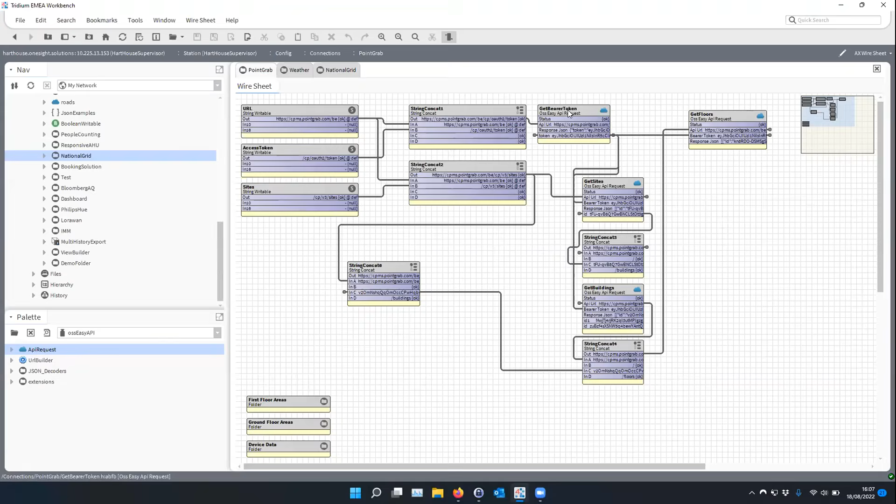Let's take a look at one. You see it allows you to build an HTTP command with a URL, parameters, header options, and you can bring back the response, which in this case is a token for authentication. Again, referring to get, post, put, and delete commands there - any credentials, supports all modern authentication mechanisms, bearer tokens, basic auth, OAuth, etc.

We also include some other tools in here to help you decode and handle JSON, build URLs, etc.

So getting to the point, what can you do with a tool like OSS Easy API? I suppose the answer is pretty much anything you want. Just looking over the front page of our website, we've got a few examples of things we've done in the past with it, and some examples of integrations our customers have made. Pulling in non-building specific information into Niagara is what we typically find the use case for a driver like this.

News and weather information, IoT sensor systems such as LoRaWAN, vendor cloud-based air quality monitoring systems such as Airthings, Kaiterra, etc. Car parking management, third-party room booking systems that feed into a vendor cloud, people counting, desk occupancy, CAFM facilities management systems, etc. CRM integration, Office 365, you name it. This is designed as a universal tool for you to integrate with systems that support an HTTP REST API.

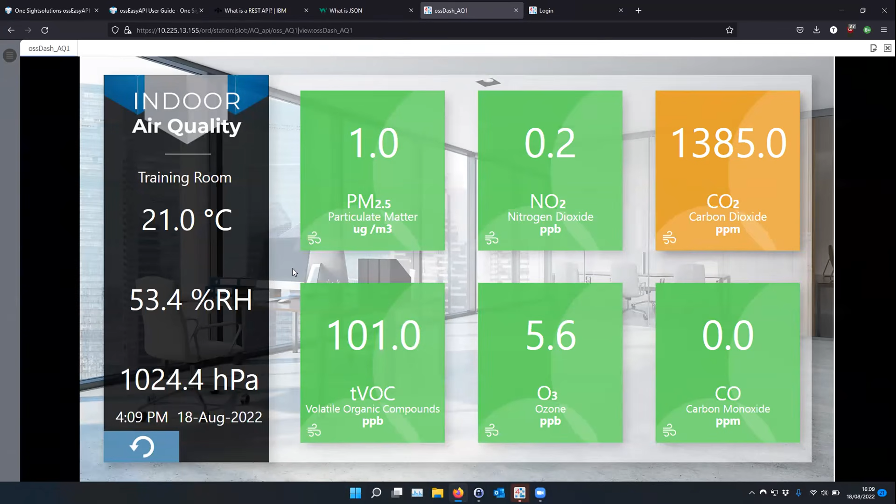You see here, for example, this is air quality information coming from an Airthings cloud-based air quality management solution. These sensors communicate via a hub up to the vendor's cloud, and the vendor publishes an API, which we have interfaced with using OSS Easy API, and expose the points from the sensors as standard Niagara points, which can be used just like you would any other point.

Some other examples - Transport for London. Maybe you want to enhance the occupant experience in your building, provide some traffic and travel information, London tube statuses. Car parking, for example - again, this is all coming into Niagara via a REST API from the Transport for London website.

Another example we can take a look at: we have a custom uplighting system in our offices here, WLED, if anyone's heard of it. You interface with that using an API, again documented. By interfacing with it using OSS Easy API, we can expose the various values and options as points in Niagara. Obviously, can provide some command and control functionality through a dashboard such as this.

Another cool thing we've done with it - we take some floor plans here, we've got some multi-sensors here. These happen to be LoRaWAN sensors, so they're feeding into a combination of the technology called ChirpStack or the Things Network. Both of those services have an API. In order to get that data back into Niagara, we've used OSS Easy API, interfaced with it, brought them back in, and exposed the values as Niagara points.

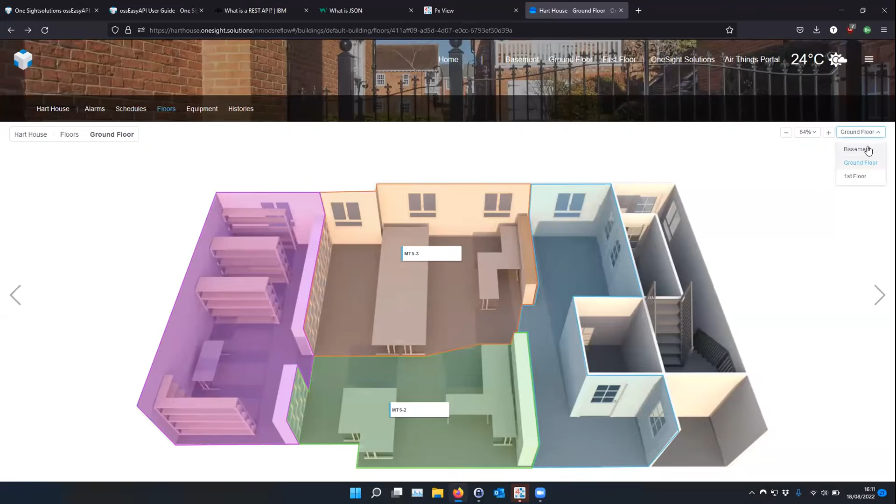Another typical use case we found with our customers - might be desk occupancy, so a third-party desk sensing solution reports its sensor data directly into the cloud. Integration option is a documented API again. Once again, utilizing Easy API with that single component, the API request component, we can construct our commands, authenticate against the API, bring back our list of desk sensors, and then break out the points.

It looks something along the lines of this. I'll just expand this out.

For example, you see our API call here that's bringing back our list of devices. Another pretty cool feature of Easy API is it does attempt to parse JSON responses for you - meaning it breaks out and gets at the data you're actually interested in rather than just giving you a big block of JSON data. So here we've broken out a list of devices automatically that exist on our Things account. You can see the different values associated with each sensor.

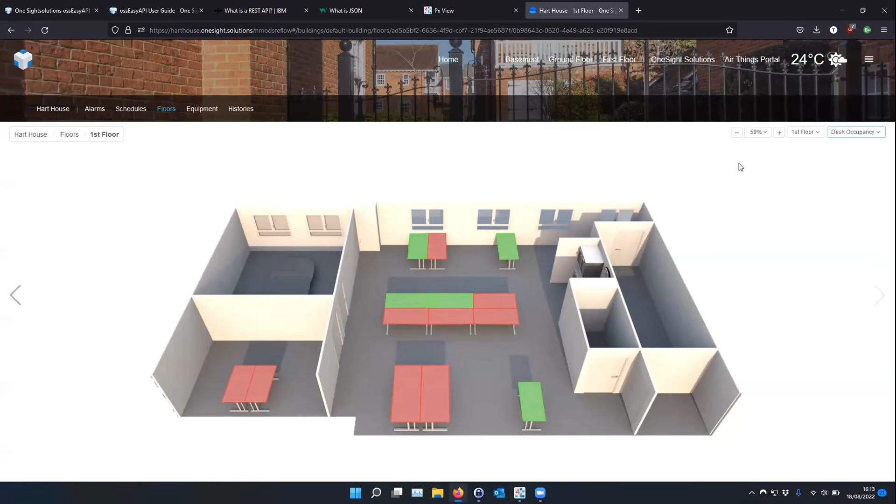So just before I close off, when we're dealing with APIs, this technology is not like BACnet or Modbus, where it's a very well-defined protocol. All BACnet is the same if it's true to the standard and the specification. APIs can be extremely varied.

So the key to it is documentation. Luckily, the documentation on how to use Easy API is all online, kept up to date for you, with plenty of examples. I'll shamelessly plug our YouTube channel as well - OneSight TV - where we publish videos on specific examples and take you through the steps. One on using OSS Easy API to generate alarms into Teams, for example, how to bring Airthings into it, bring in weather data using the Open Weather Service, etc. All documentation is available like that.

So long as a system you need to interface to supports an HTTP-based API, and the API is well documented, there's a fair chance you'll be able to use OSS Easy API to interface with it and extend your building system with non-building centric data or data from an IoT style system. And there you have it.

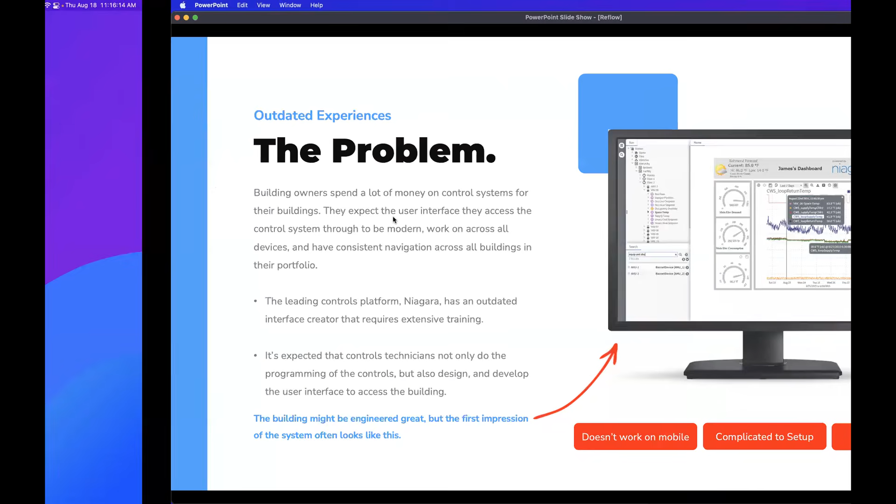So really excited to share Reflow with you today. I want to talk a little bit about the problem that Reflow tries to solve and some of the benefits you can expect when you pull Reflow in. We're in this changing and evolving landscape when it comes to user interfaces and customers and their expectations around those user interfaces. We've got building owners and operators who are used to a certain level of sophistication, and that expectation is growing more and more as time passes on.

We've got people using mobile apps like Instagram, Facebook, online banking, stock trading applications that have a really slick UI that works on their phone, developed by large not only development teams, but also designers and user experience focused individuals. And then they come to their building automation system, which could be quite expensive, and they're often confronted with a user experience that just doesn't quite measure up to their expectations.

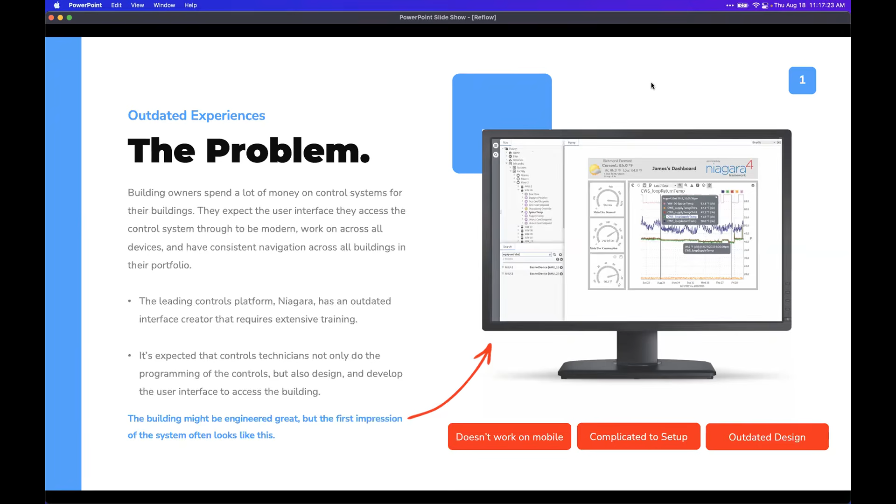Part of that problem is because our industry has put a lot on the shoulders of system integrators. We know that they're amazing engineers, and Niagara is the best engineering tool out there. However, when it comes to user interface and all of the things, including APIs that Tom walked through, we're now expecting a system integrator to not only wear their integrator hat and their customer service hat, but now they need to wear their IT hat, their web developer hat, their graphic designer hat, and user experience architect hat. It's too many hats to wear.

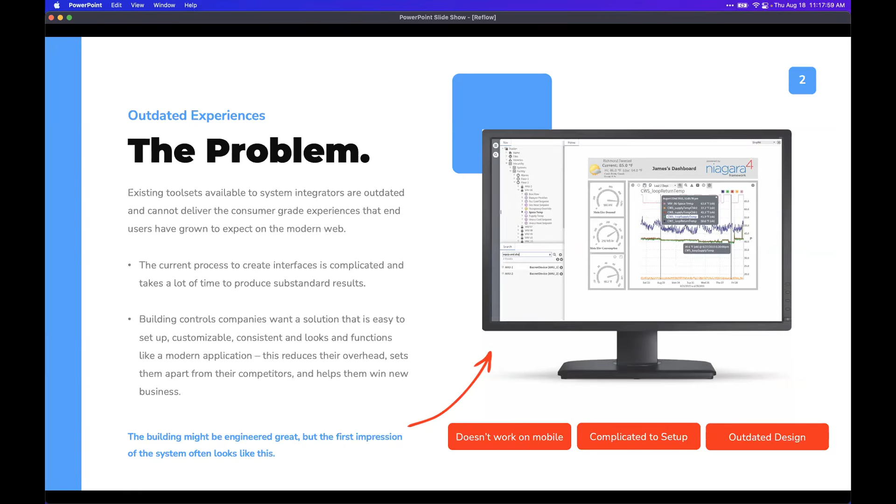So what we've tried to do with Reflow is provide a very simple solution to get modern graphics to end users. And instead of this process taking longer and adding labor to jobs, what we want to do is make it shorter and faster and easier than using Niagara out of the box.

We always say we're sort of like the Squarespace or the Wix for building automation. The idea would be you don't have to know what HTML even means to jump in and start creating content in Reflow. So I'm going to jump over to our website here.

I've got a few live demos available, and these are accessible publicly if you want to go in and play around with them after the webinar today.

When you click on them, you'll be brought to a web supervisor that we have in the cloud. Your login information will be filled in for you. Just hit login, and we're going to go through some of the end user features of Reflow here.

We've got 3 examples. When we say end users, typically we're referring to building owners, facility managers, building operators, maintenance staff, so on - the people that are consuming the building automation system. So we'll start here. This is a quick example of a building website that spans across a campus.

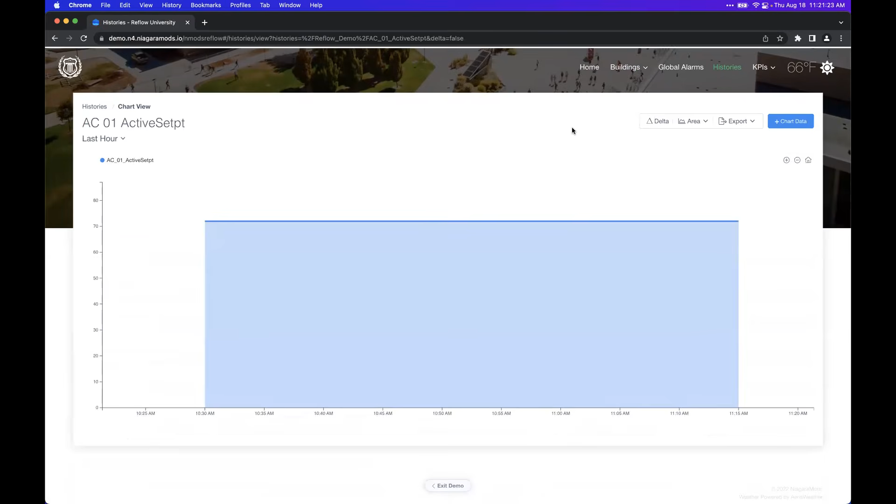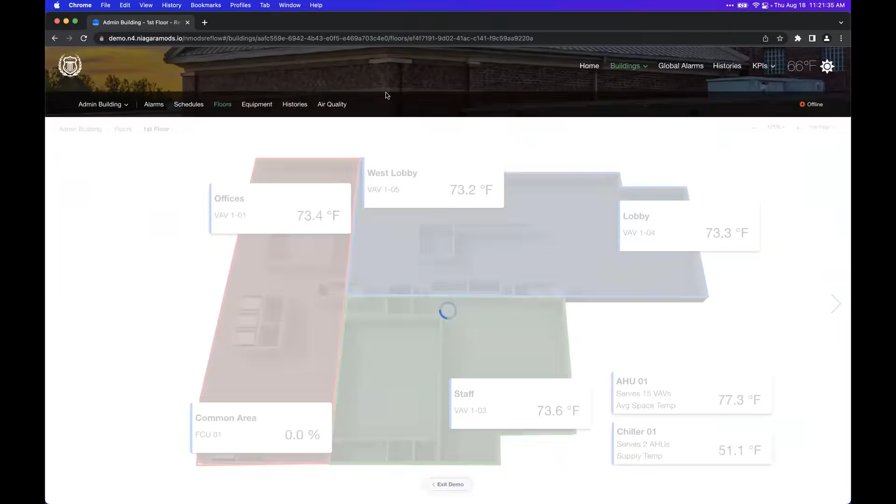Reflow also has a floor plan builder, so I can go into floors here. And you can see that we've got some labels and some zones. Floors are interactive, you can zoom.

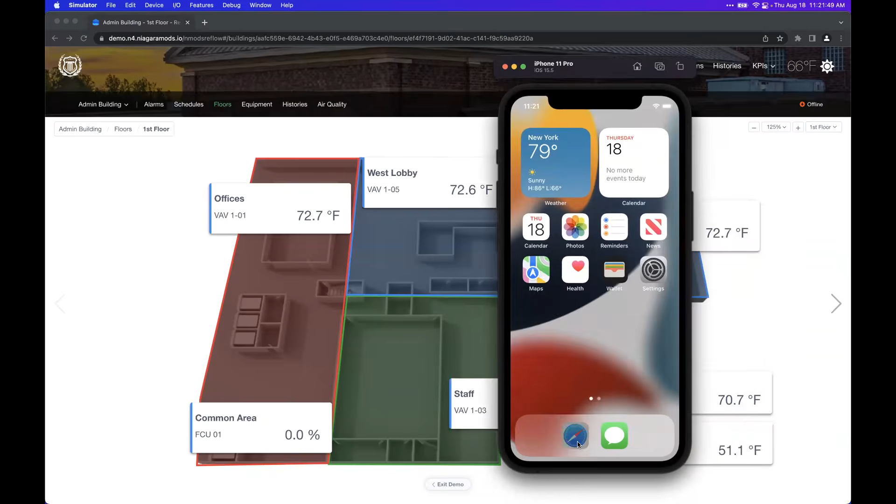And then the other thing, we mentioned multiple screens. So I want to bring over an iPhone simulator here and pull up the same demo and just show you what the mobile experience is. So here we'll launch this Reflow University.

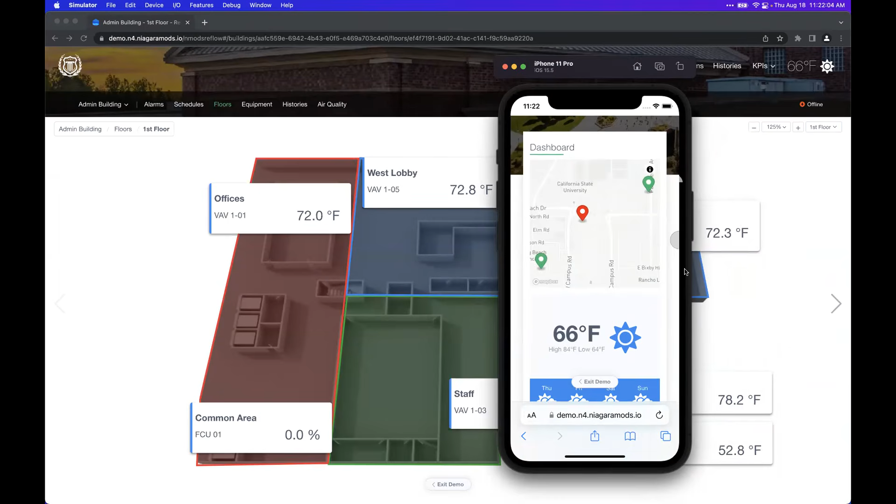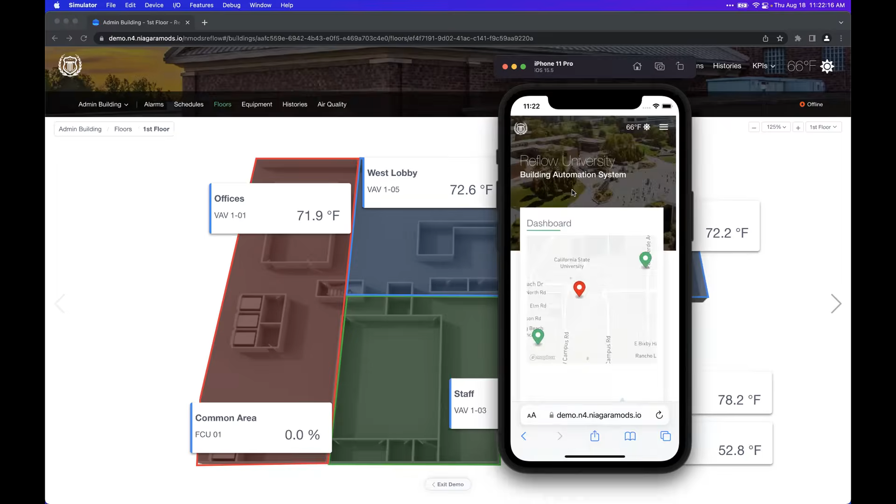Here you can see my dashboard moves to a single column. All my cards are available. My menu and navigation at the top has moved to what we call the hamburger menu, standard mobile navigation. When I jump into a building, and we'll go to the same admin building, the first floor here, just swiping down.

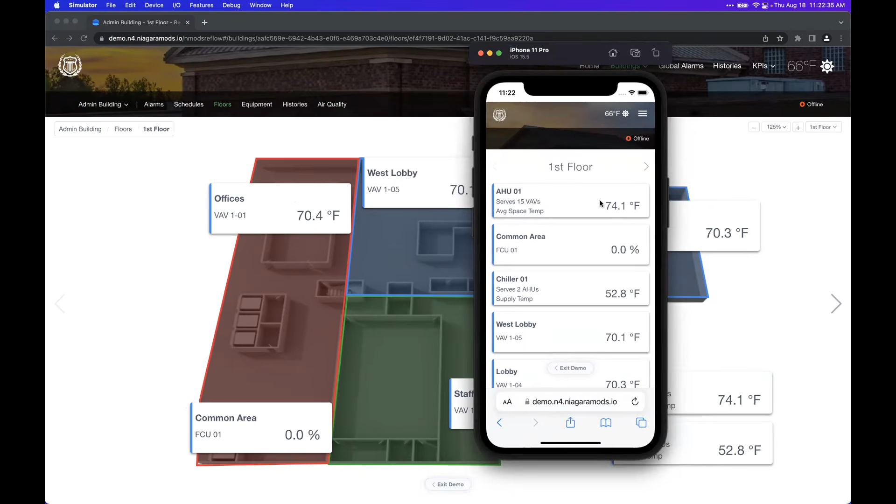You can see that we provide a different experience for users when they're in mobile, and this is all done automatically. What we're doing is pulling this data up to the front, so that when a user is mobile, walking through a hallway, they get the most important data right in front of them immediately.

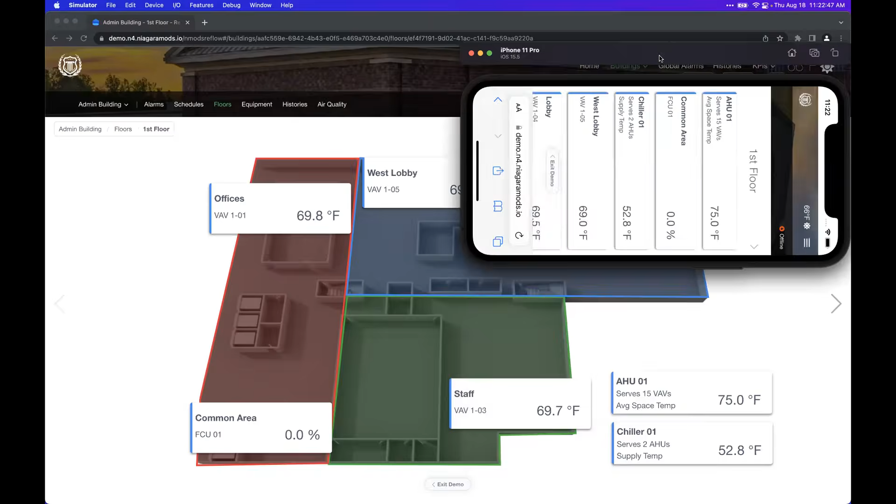Now, we know mobile users may still want to see this map and pinch and zoom. So all they have to do is rotate their device, and now they've got the full map available to them.

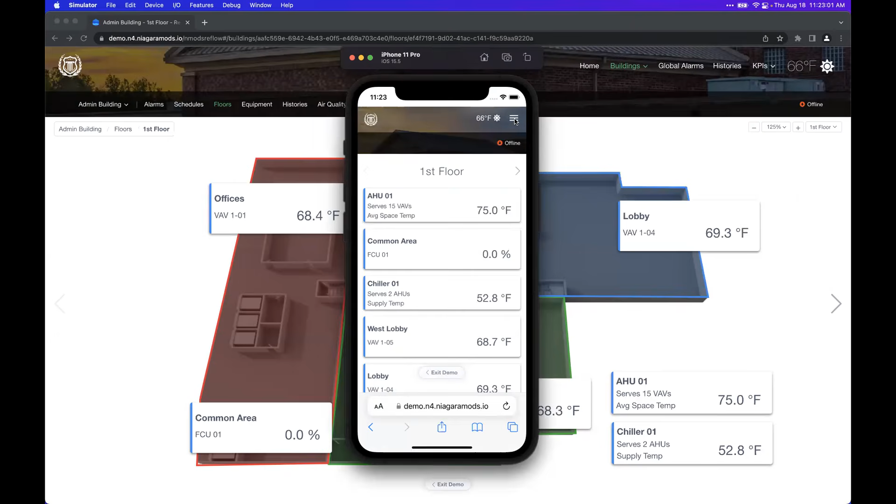Other areas where we do some really cool things with mobile include alarm records and similar data - we'll take a table and move it to cards. Really customizing the experience to users based on what screen size they're on. This requires no responsive panes, no additional thought from a system integrator - all of this stuff just sort of works out of the box.

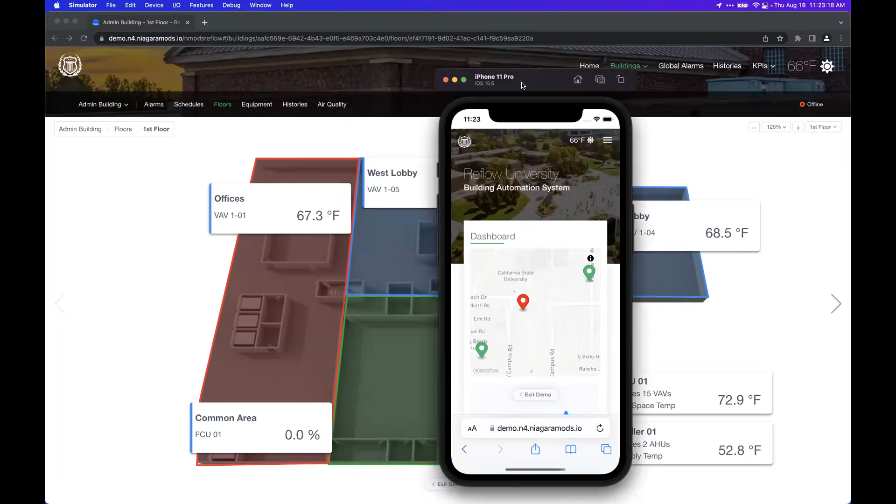Quickly now, I'm going to jump to a station that I have running locally. Just log in here - this is running on my computer, so no real equipment or anything connected in, but I just want to give you a quick example of how things are configured and what Reflow is going to look like out of the box when you get started.

So this is the Reflow view, very similar to the view we were looking at earlier. Here's that example of alarms pulling in the alarms console - all this again comes in automatically.

I also have the config view available here. When you connect to Reflow in the config view, you're going to get a preview of what your end users will see, but then you'll have this panel over here to make changes. I just want to show you quickly how easy it is to start to customize Reflow.

So we'll just start rebuilding the Reflow University site here. You can see that as I'm making changes on the left, it updates automatically on the right - things like setting a global color scheme. Let's grab this darker blue here and set a secondary color of maybe this red. You can see that Reflow instantly changes the color and applies that color across your entire experience.

Let me just switch these hover colors out here. And now when I go to something like the alarms page, you can see my highlight is my hover color. When I select items, the primary and secondary colors are pulled through the entire experience.

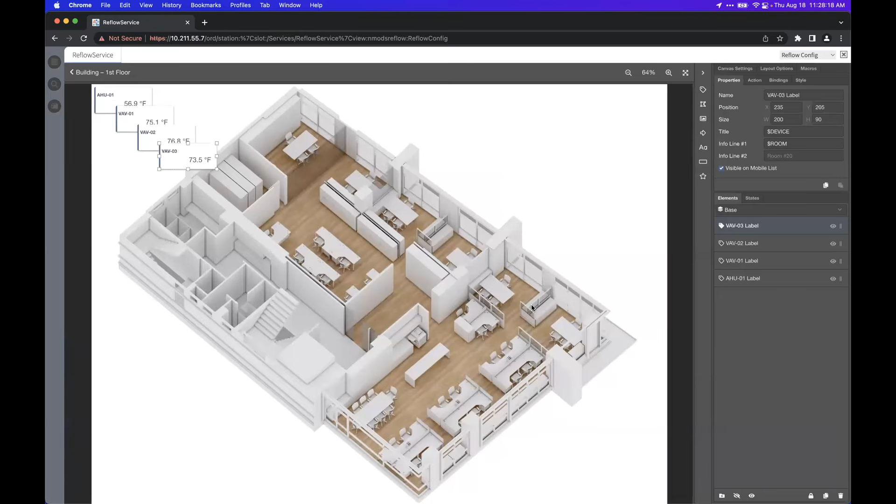One of those is creating labels for devices. My building's first floor has 3 VAVs and an air handler assigned to it. Reflow will automatically create and link those labels up for me. So now I just need to put my VAVs into place and move my air handler label over here, maybe add some room names if I'd like. I can also do that in Reflow and those will come in automatically. And you can see that now points are linked.

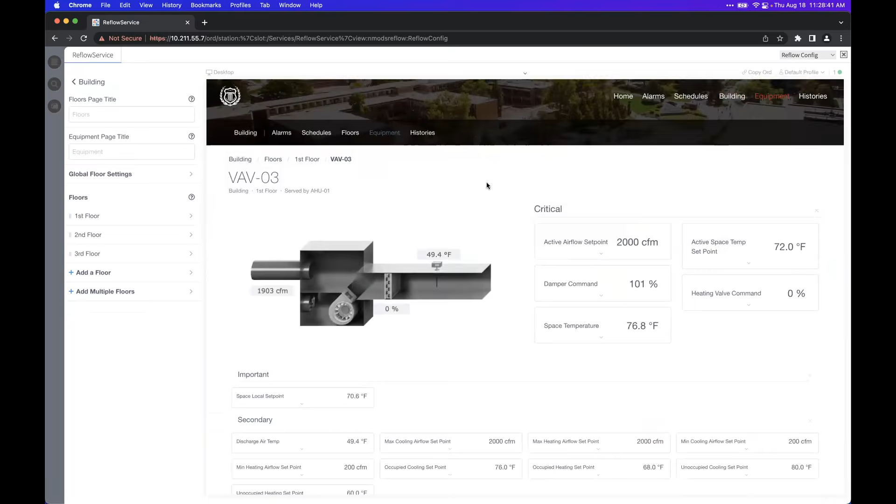If I jump out here, you can see that when I click on a VAV, we get to the equipment graphic. Equipment graphics in Reflow provide these point cards, and you can click on them to take actions. If points have a history associated with them, you can get directly to that history from the point card. You can also embed either a static image or a PX graphic over here on the left, or even make it stretch full screen.

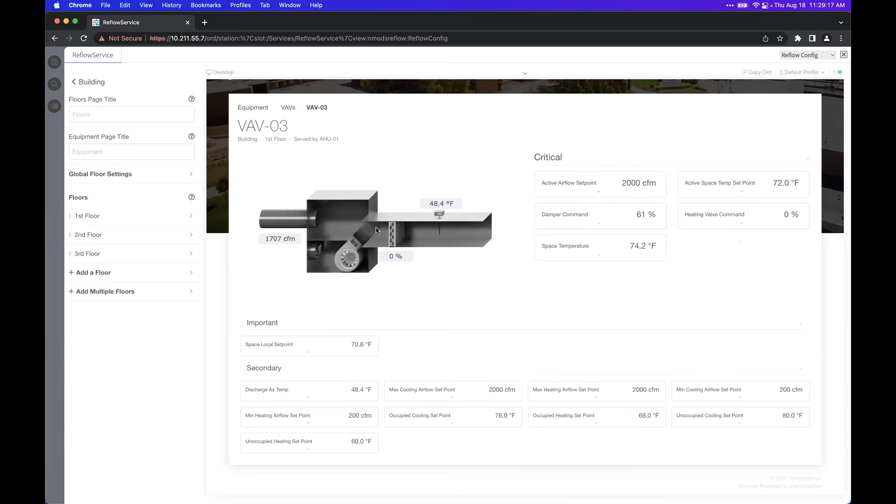So Reflow is providing that modern user experience, and I see that's one of the questions—you can absolutely embed PX files almost anywhere in Reflow. If the sharp-eyed in the group noticed, Tom's demo actually used Reflow and embedded a PX file using Easy API to pull in some data. You can do that in a couple different ways.

One way is you can add what we call an HX card. Here I can just add a dashboard card, pick any view from Niagara that's going to work on the web. So I'll grab, say, this property sheet for my points folder, and there's the full actionable Niagara property sheet embedded right into Reflow. So yeah, completely possible to do that.

Here's maybe a better example. I've got sort of a very crude PX floor plan on this folder, and that pulls in and gets auto-sized to the card. Of course, you can change the card width and height to show more data, and do things like moving cards around—just drag. Notice your dashboard flows perfectly.

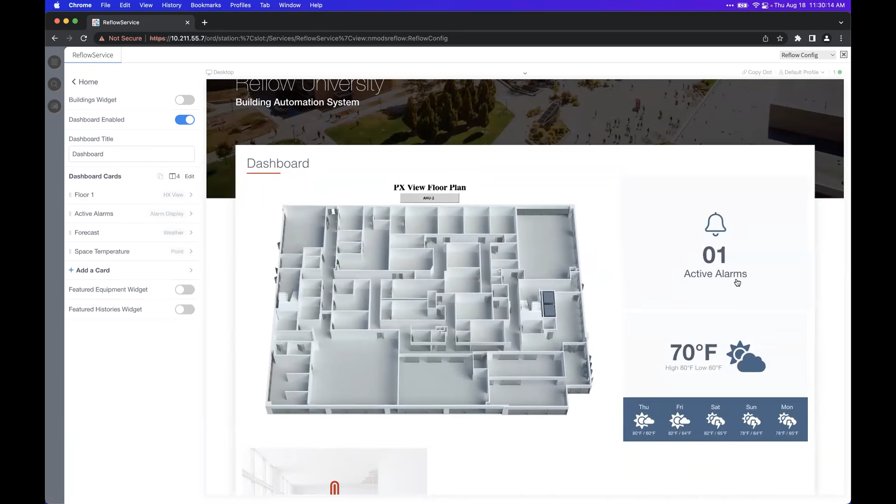As I move into mobile, another feature of config, I can preview in mobile. You can see that auto-size down, and my other cards are full column. Here's what it would look like on tablet, and here's what it would look like on desktop. Again, I didn't put any thought into that layout, how it flows—Reflow just takes care of all that for me.

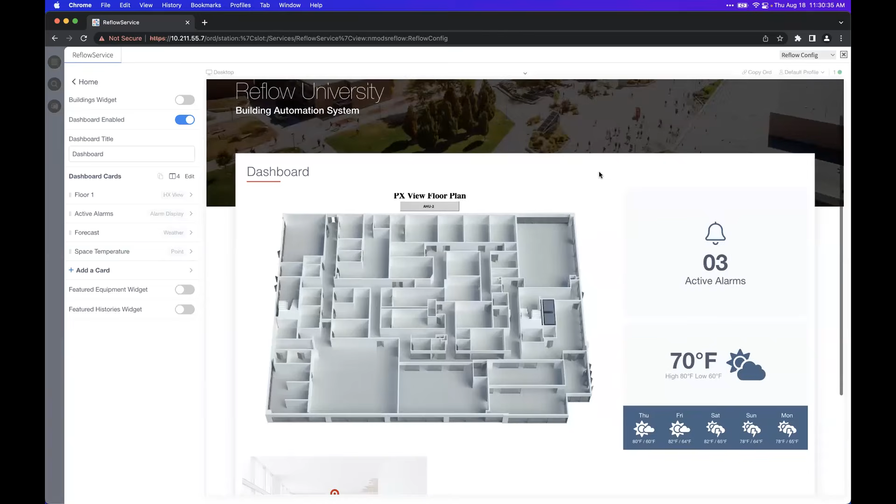You can also embed PX files as custom pages, and as I mentioned earlier, as a part of equipment. One other quick thing on the equipment side—if I go to VAVs, here you can see all the VAVs I brought into Reflow. We display these nice cards with a featured point.

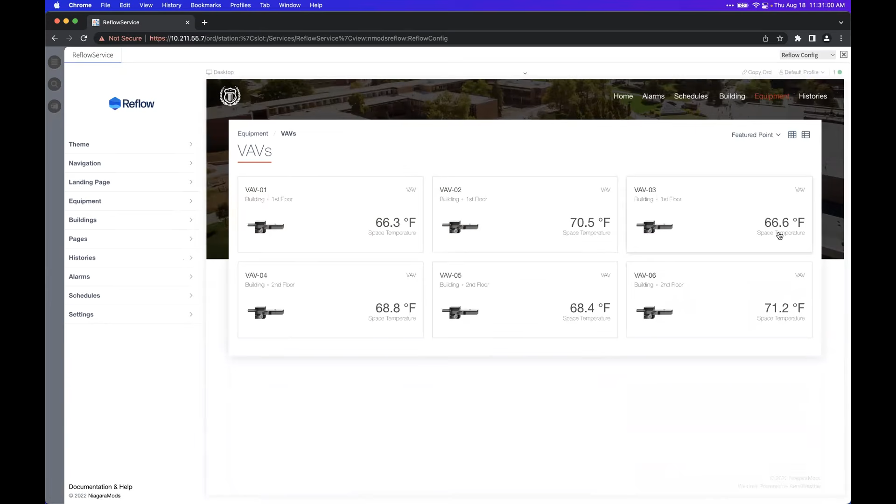We try to give power to end users. So while I'm showing the featured point that an integrator selected, an end user can go up and choose any point associated with their VAVs and compare across devices. Better yet, if they want multiple points, they can look at table view. Now we pull in many columns of points, and the user can still customize this to see what they need. The idea here is to prevent rework and prevent an integrator from having to go back to a job, edit 10 PX files with 50 devices each to add another column because a stakeholder wanted to see some new important data as part of their equipment.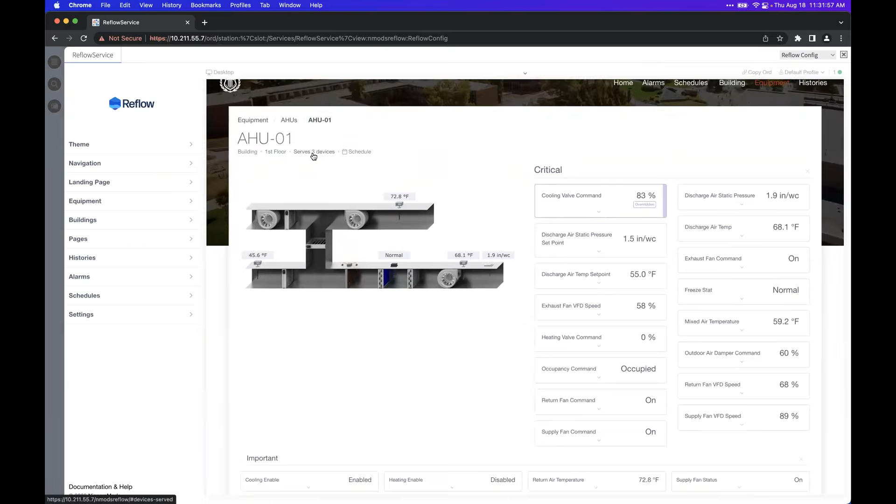I'll jump back to one more thing in equipment, we'll look at an air handler. In Reflow, you can link devices. Some devices can serve other devices, and you can see that this air handler on the first floor serves my 3 VAVs, shown at the bottom of the screen here. Now I can quickly get to VAV1 and see that it's served by air handler 1, and get back.

Here's a great example of an override and how we display status. I just want to show you what an equipment graphic looks like in mobile. Notice that you're interacting with these cards the same way in mobile as you would in desktop. So training users and maintaining consistency is really easy, not only for system integrators, but also for your end users.

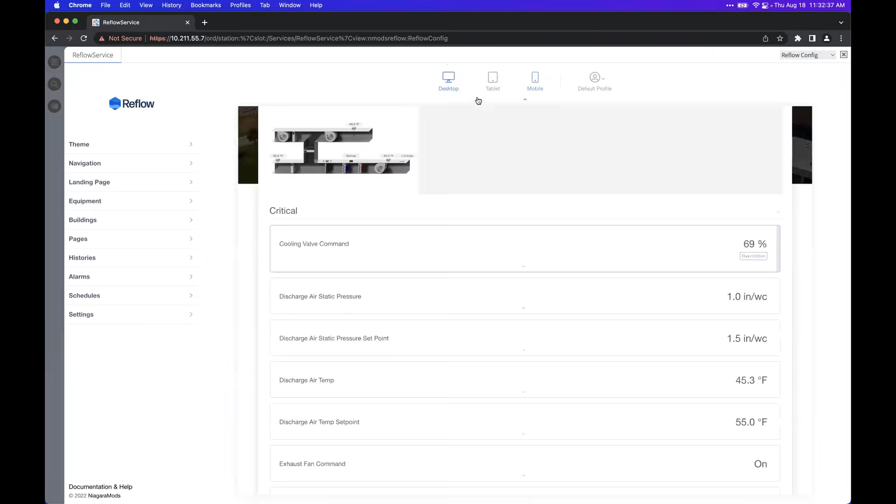And that's really important when you think about a good user experience. Documentation is built into the tool, so if you click on documentation and help, you'll get to our online documentation, which is pretty comprehensive. It's also available linked from the marketplace and from our website. If I pull that back up on the Reflow page, just look down here under resources and click on documentations.

Real quick, I think that's really it for the demo. I do see one question around multi-language support.

For the most part, almost everything in Reflow can be customized. So for instance, things like the title of your equipment page can be changed, and that will get you most of the way there. Equipment types and devices, of course, are all able to be changed, but certain areas are specifically in English, for instance, group by type or group by floor, or last 8 hours, things like that aren't customizable. We do plan on rolling out multi-language support, hopefully by the end of the year, but if not, right at the beginning of '23.

So with that, I will thank everyone for their time and turn it back over to Bob.